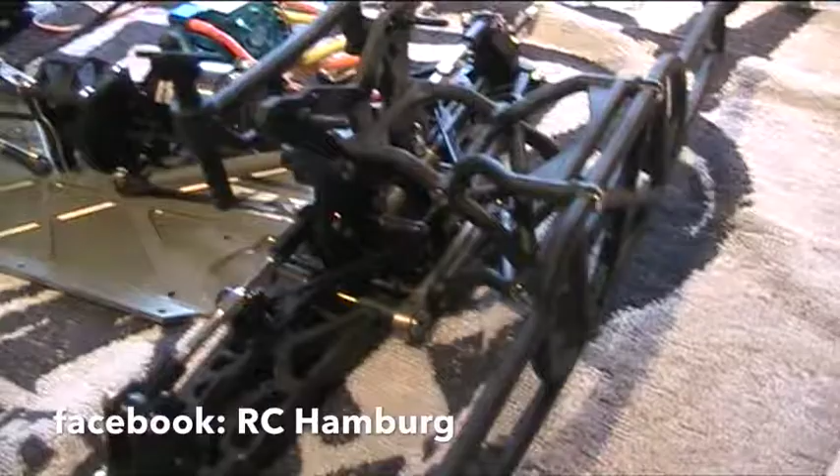Here is the assembled rear part of the car. So we have front, mid and rear. And now the next step is to build the shocks.

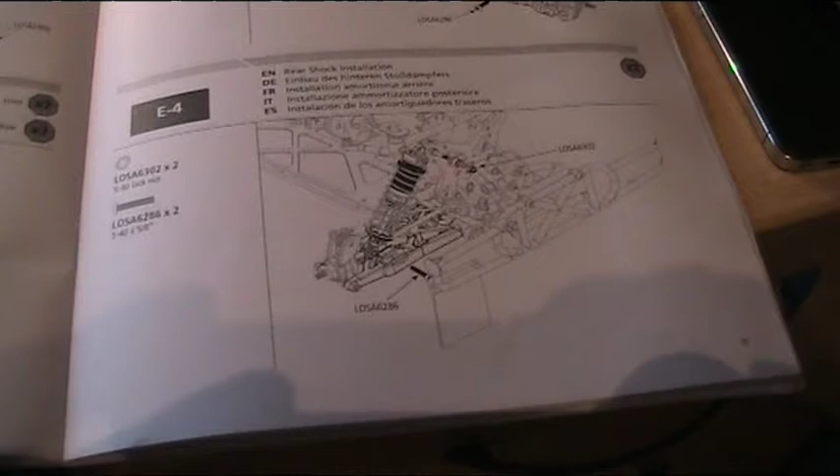I have here only 4 or 5 steps in the manual, and here are the parts for it. It's bag E, but I have here also bag I. Bag I are these parts.

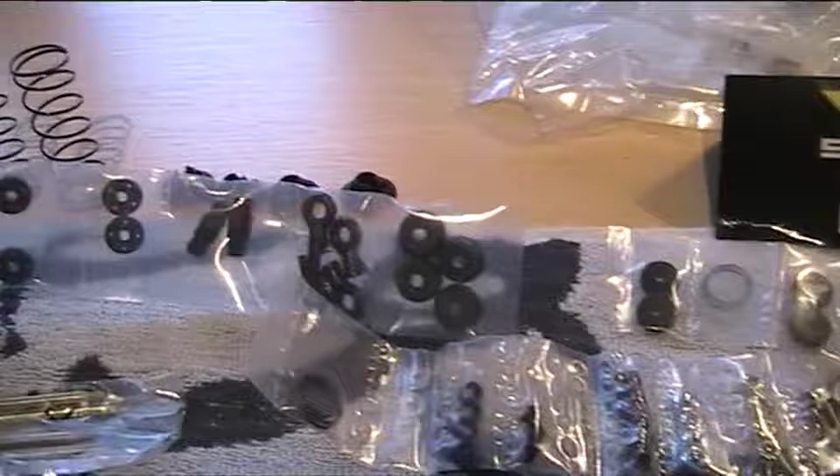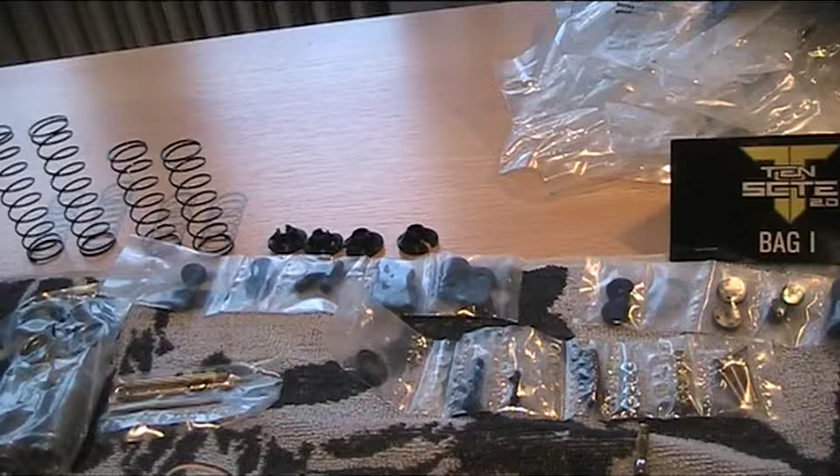This is very nice that they included it, because here they have the damper plates with the numbers 1, 2 and 5, and for the standard setups they use 3 and 4, so I have all damper plates that are available for this truck. They say to use front 3, rear number 4, but I will use for the front number 4 and for the rear number 5,

because I often drive on bumpy tracks, and on number 4 and 5 the holes have a bigger diameter than numbers 3 or 2, for example, so the oil flows better through the holes of the damper plates, and the car will handle better.

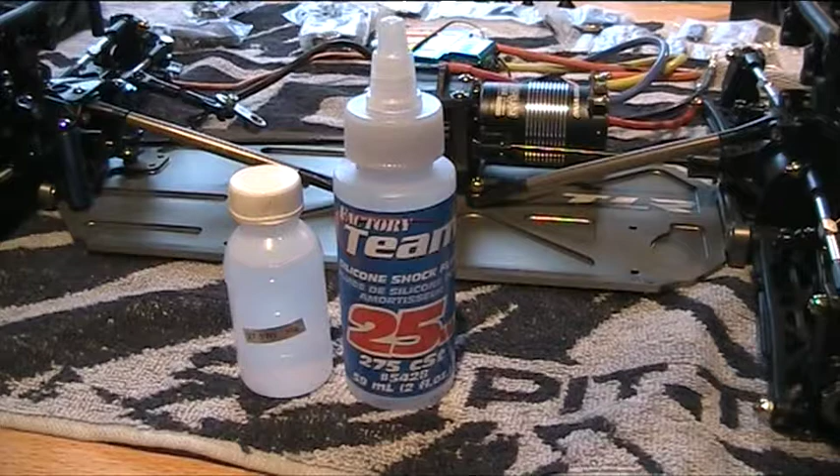The shock oil that I will use is this 25, which is for the rear, and the 27.5 for the front. This is included in the kit.

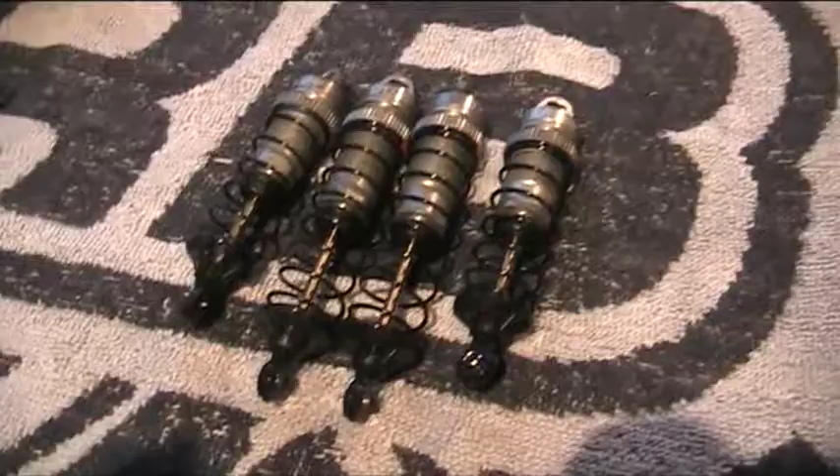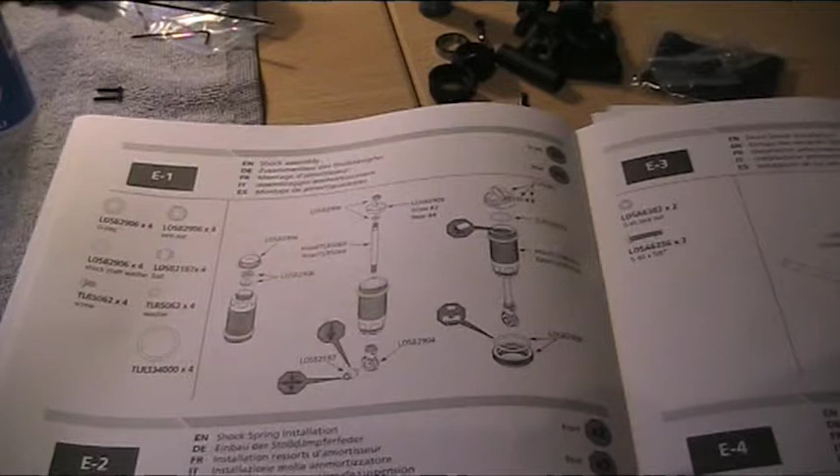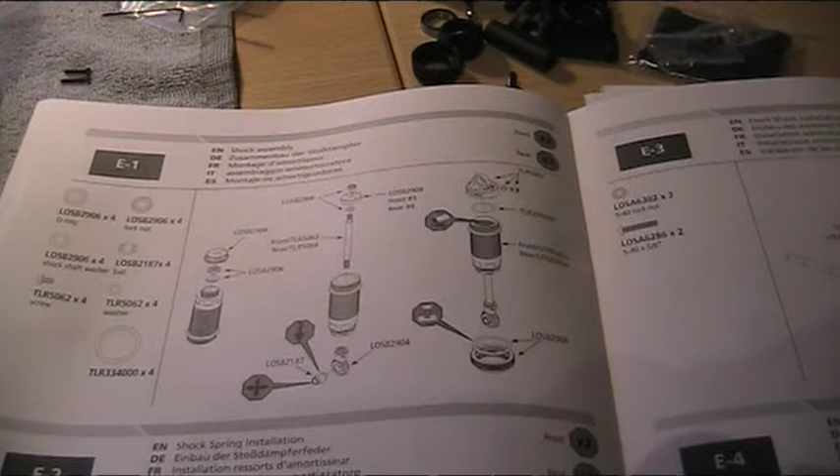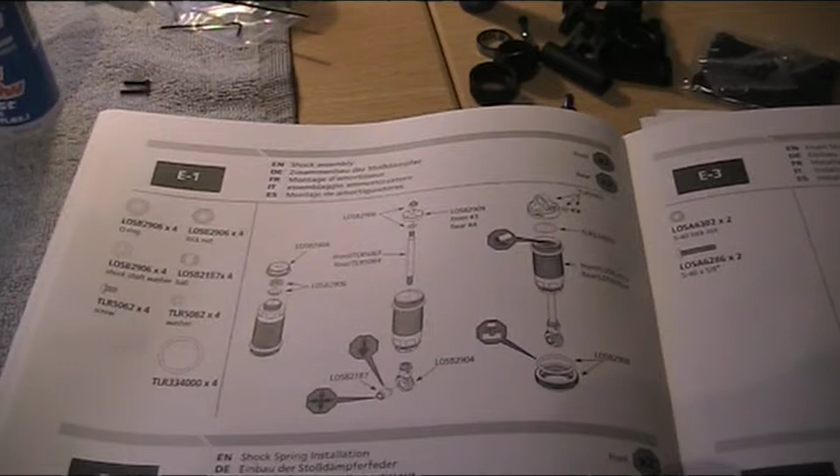The shocks are built, but wherefore are these O-rings? It's strange, I don't know, because the instruction manual does not say anything about these O-rings. By the way, this is the only build step for the whole shocks, and in my opinion this is not enough. I know what to do when I'm filling shocks, but maybe not everybody, or who does not often fill shocks. So I do not really agree with having such a small manual here.

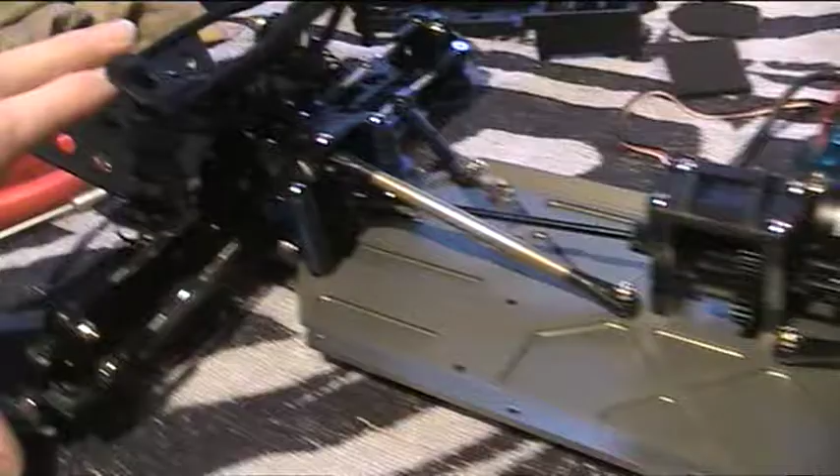The shocks are now mounted to the chassis. And so not much is left to do.

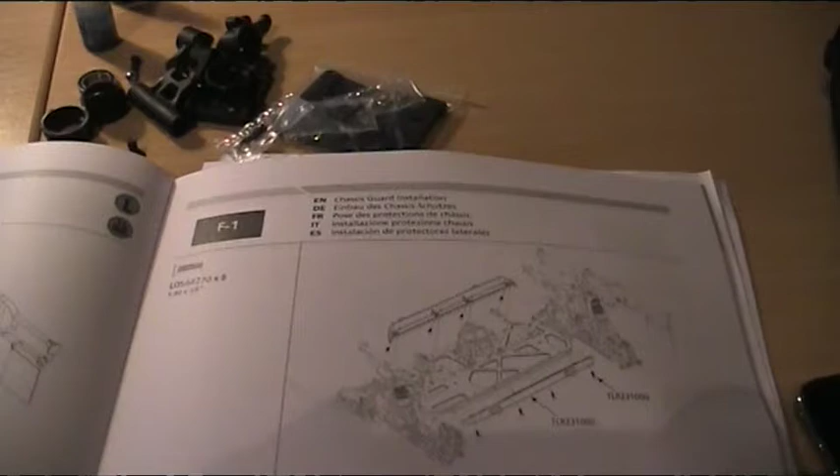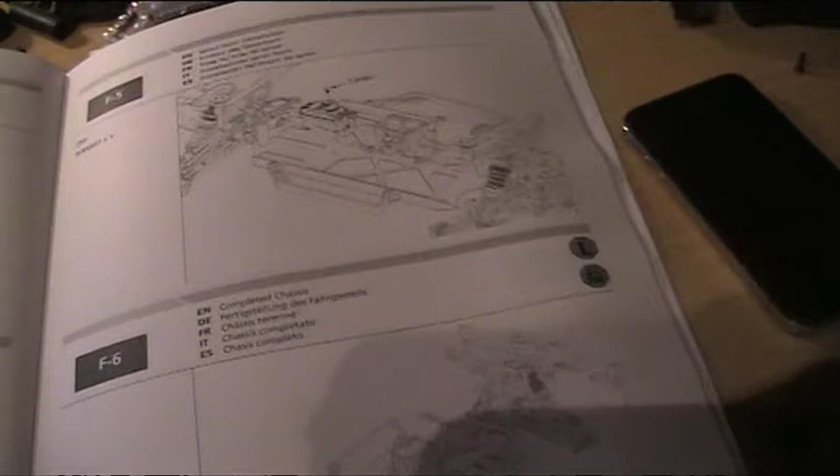Bag F. F are the chassis guards and side bumpers, the servo installation, and here comes the battery tray. And that's it. So after this I only have to solder my electronics, or resolder them, and put some tires on it.

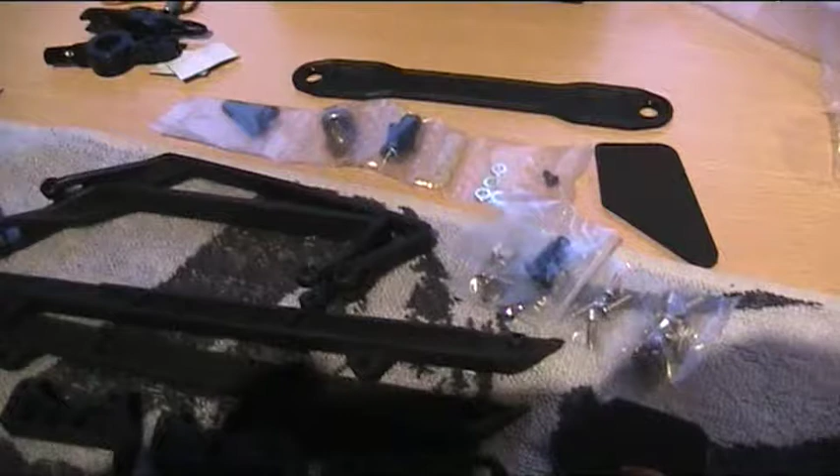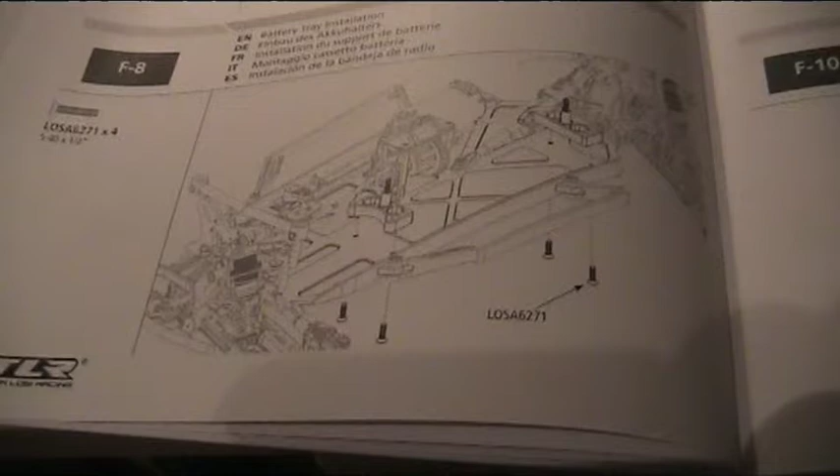But first, bag F, and these are the parts for it. I am here at point F8 to mount these battery holders into the chassis. I need this screw 4 times, but the only screw that I have in this kit is this one.

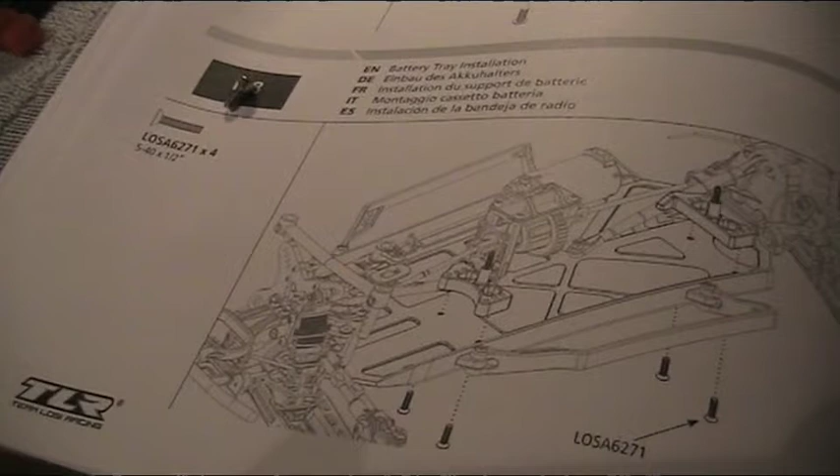It's shorter, so here's a mistake in the manual. I think it will not be a problem, but it's an error, and I just want to mention this.

It is finished. Here is it.

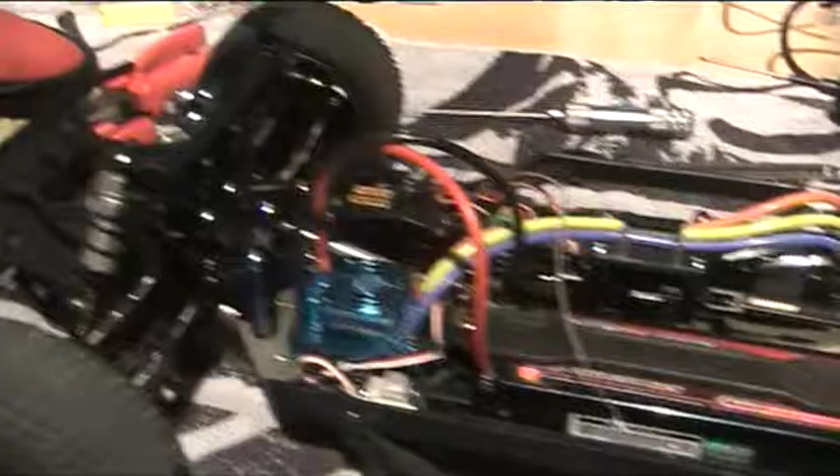I mounted already the tires on it. These are very old tires, but for first drive, or first test drive, it is okay. And here are the electronics.

These cables must be very long because the ESC is here, so the motor connections are here, so it's really a long distance. And my sensor cable was not long enough.

This goes from here to somewhere down below here, and normally also over this bridge if there is some space in it. No, I don't think so. It's filled with these cables, so I must put the sensor cable, or route the sensor cable, another way.

But I have not such a long sensor cable. But the motor runs also without sensor cable, not so smooth, but for first test it is okay.

And here's the servo and the receiver, and the transponder on the side.

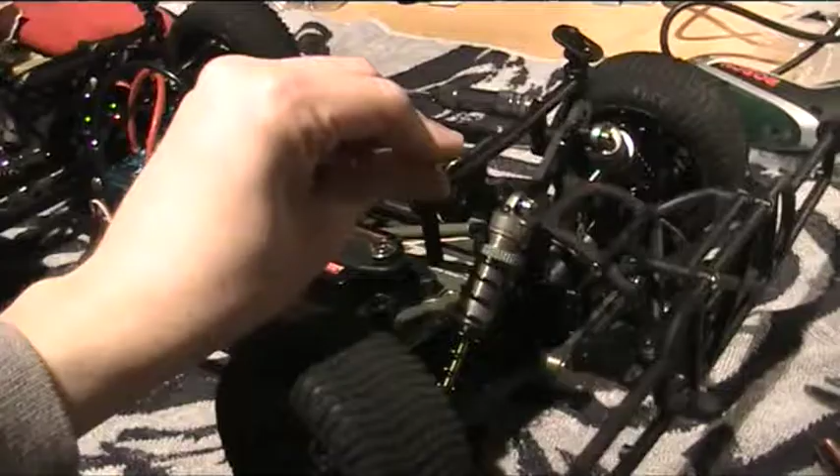The damper configuration is quite soft. I hope it's not too soft. It feels now at the car, or the dampers on the car feel now quite smooth. But I will see how it will perform on the track.

What I can see at the final car is this very big angle of this wheel, the big wheel. So I really built it according to the manual, but I think 10 degree or more camber is not the best thing. So it's here also a question why they do not make it correctly and give us the correct result for this upper turnbuckle here.

So I must recalibrate this. Also the front steering, the tires look inside. I have toe in, which is never used. I have a little bit of toe in. I don't know if you can see it on the picture here, but this is also not recommended. It must be the other way. I need 0 degree or a little bit of toe out. So also here I took the measurements from the manual for these turnbuckles, but the manual is here also wrong. It's only a small issue, but why not do it correctly the first time?

I think it looks great. Okay, it's completely new, it's clean, but with this used color here and the carbon and the quite good plastics that I used here, it looks very nice. But as I mentioned, there are really some issues during the build of this truck, but at least I got it finished, and now I have to see how it performs.